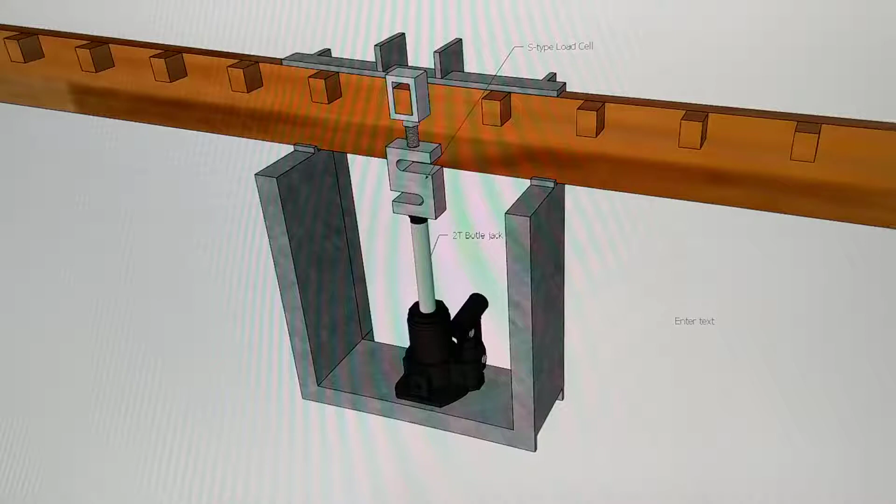Okay, I gotta share this with you guys. This has been taking over my brain doing this wood testing. So this is the rig I'm thinking about.

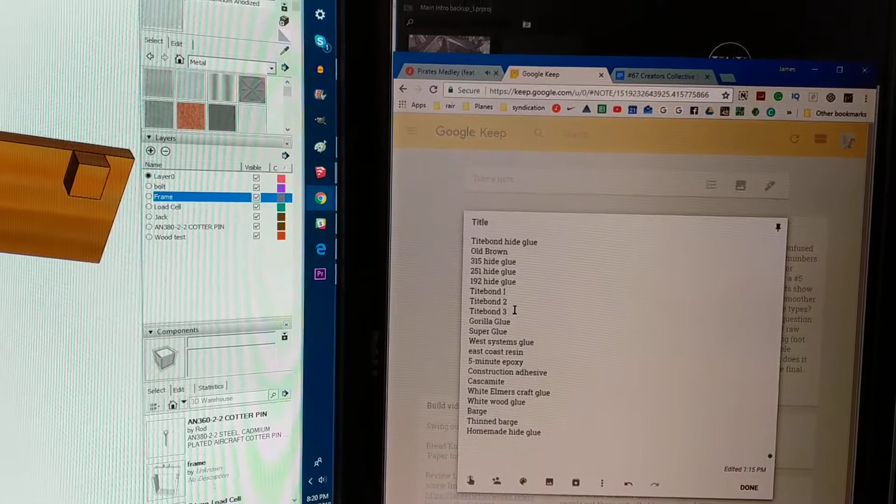Over here I've got my list of glues I want to try. Titebond, hide glue, old brown, the three different grades, 315, 251, 192, Titebond I, Titebond II, Titebond III, Gorilla Glue, Super Glue, West Systems Epoxy, East Coast Resin, 5-minute epoxy, construction adhesive, Cascamite, which is one that a lot of Europeans like, white Elmers glue, white wood glue, Barge, thinned Barge, and homemade hide glue. I'm actually distilling my own down from rawhide. I think it's 21 right now, something like that.

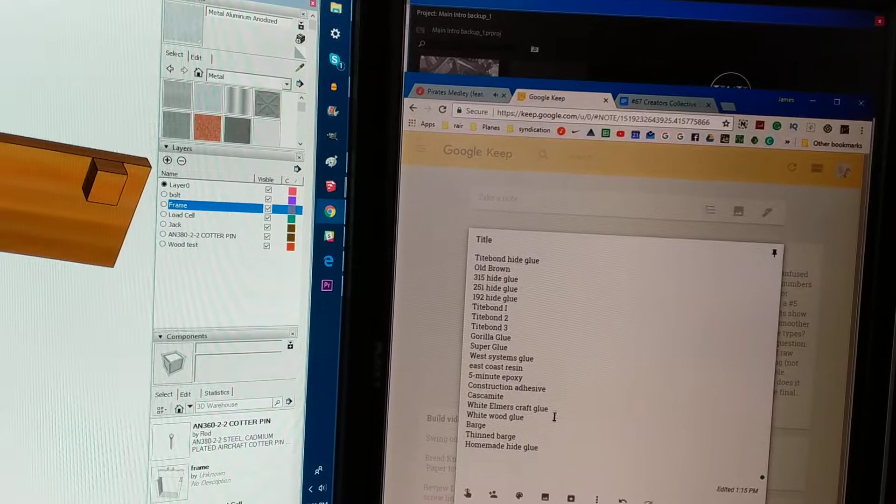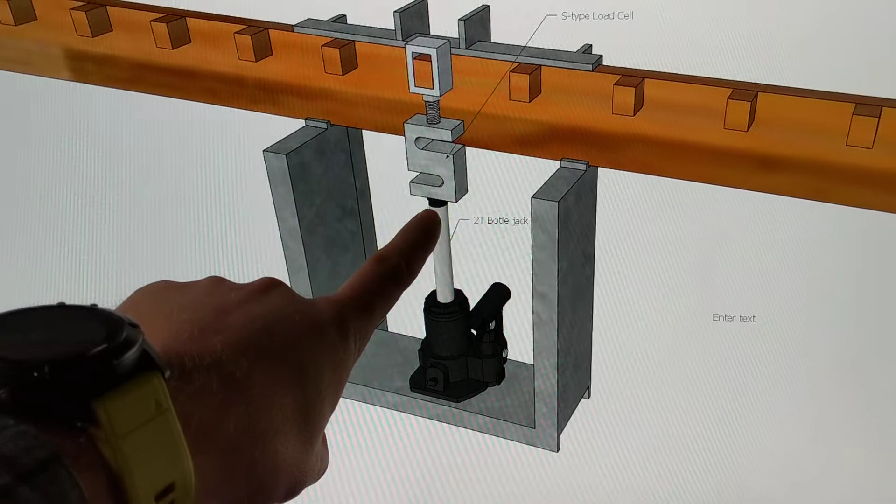So I want to try all of these, and this is the rig I'm thinking about. Here I've got a bottle jack that pushes up into a load cell, and this load cell is connected to a box that completely surrounds the wood.

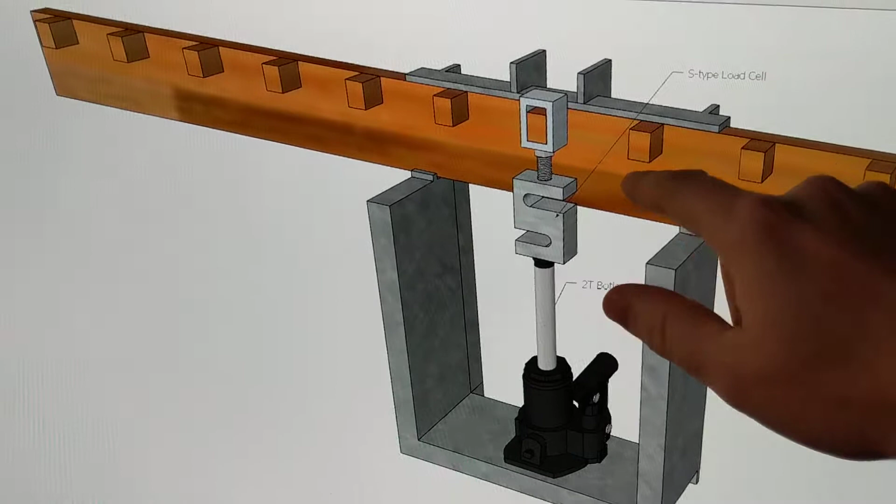Now the one thing I want to do that other people haven't done is actually test the bond between this little block of wood and the main block of wood. A lot of people test have a failure point where the wood itself breaks, and I don't want to do that. I want to force the glue to break, so that's going to make a ton of pressure, in some cases probably close to a ton.

So I'm going to be boxing this in and completely supporting this little piece with steel around it, so that all the forces on that shear line and this top bar that runs along the board are right up to that, so they're shearing against each other. So I get a complete shear pressure.

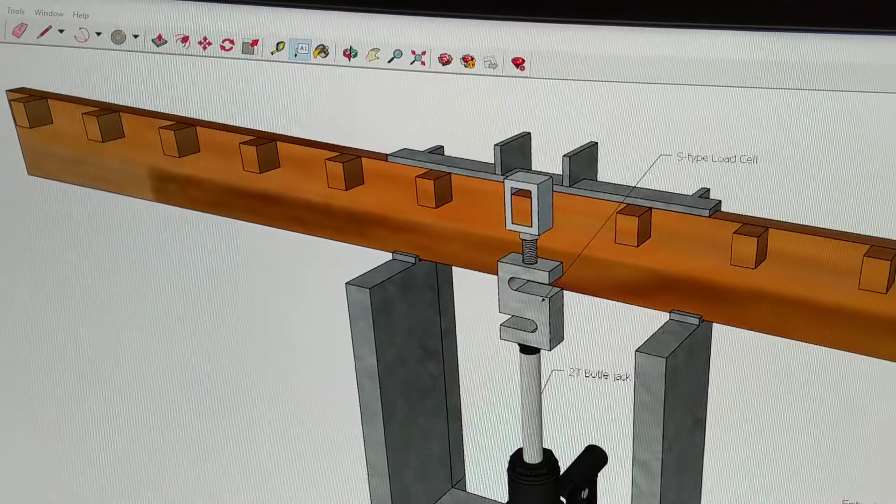The nice thing about this system is I can take this block and rotate it 90 degrees and also test the end grain of it. So I can have face grain to face grain, end grain to end grain.

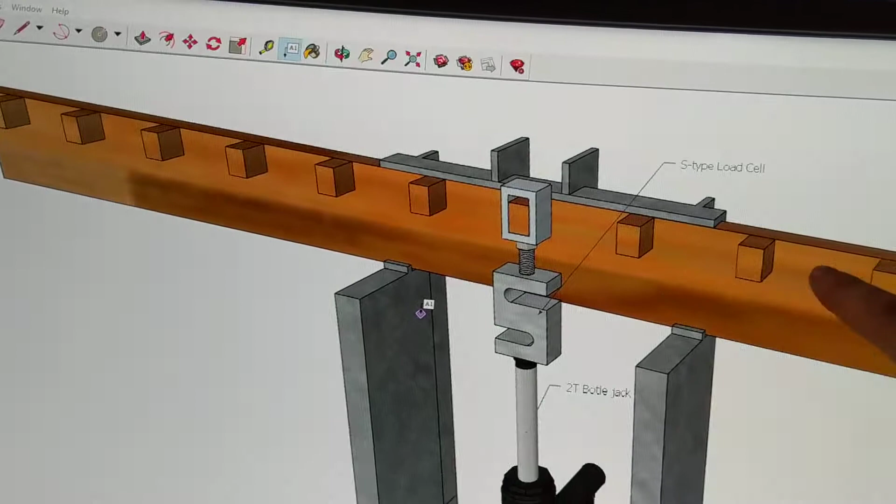And then I can also remove material from the back of the block and test how well it holds up on voids. And I can take this whole wooden piece with all these blocks glued onto it and set it outside in the rain for a day or two and then test it in moisture. So I can do all 4 of those tests.

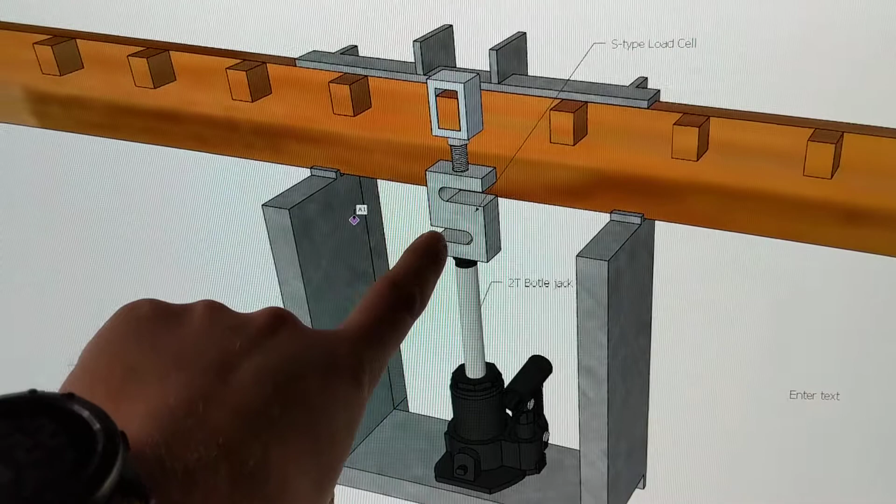I'll need a whole bunch of these boards made up, and each one will have a glue holding that one glue on here, and I'll mark underneath it what its glue was and what pressure it sheared off at. This load cell will give me the highest pressure before it lets loose, and I can actually see on the computer the bar graph of what that says.

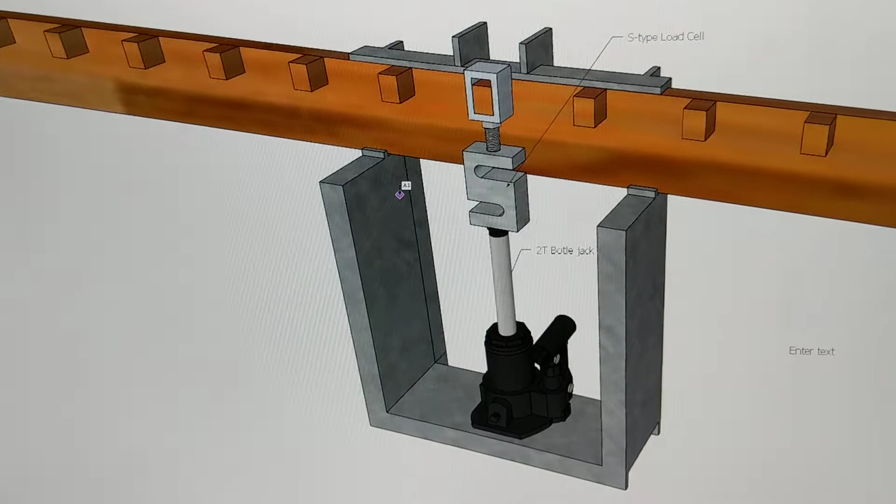All told, this rig has probably ended up costing me somewhere around $1,000. But I think it would be good information, having all 20 of these, particularly with the hide glues. I haven't seen much information on the hide glues, so I'm really looking forward to doing that.

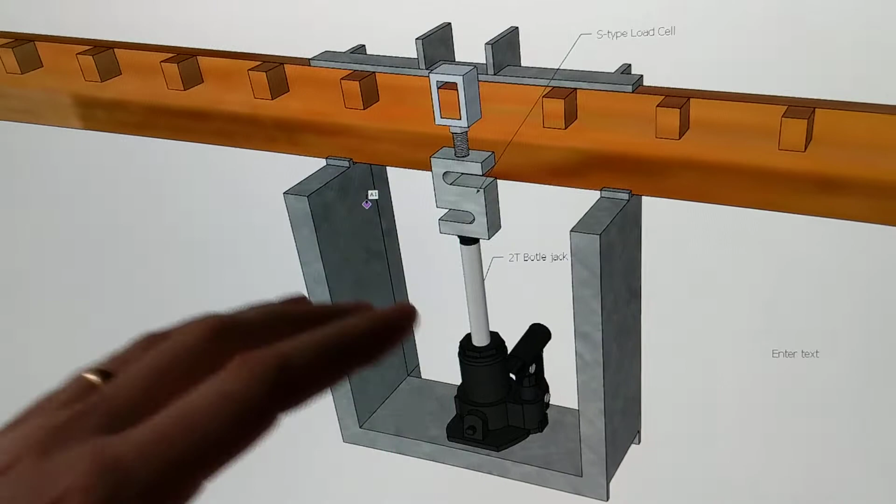I'd love to hear your ideas on this particular setup. I'm really trying to focus on the glue. I don't want the wood to fail, and I don't want to test different joints. I actually want to know what is the strength of the glue and the glue alone, eliminating all other variables. That's why I don't want to do a lap test or a joint test. I want to simply know what is the glue strength.

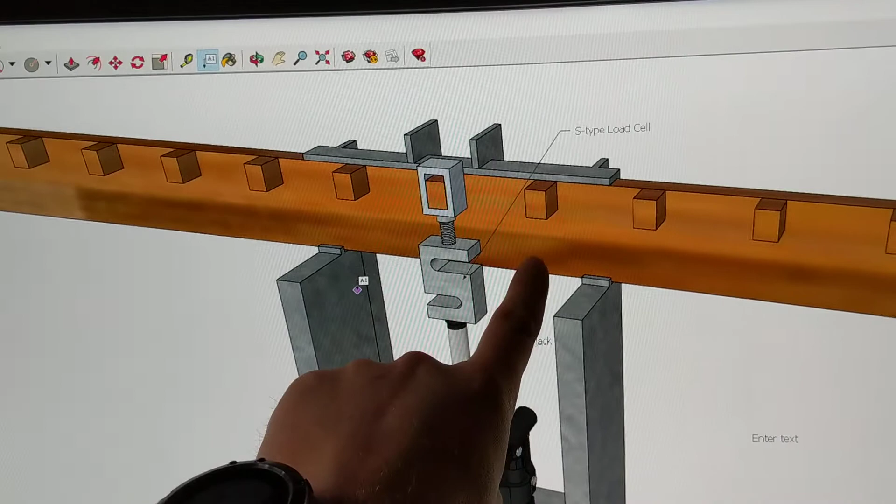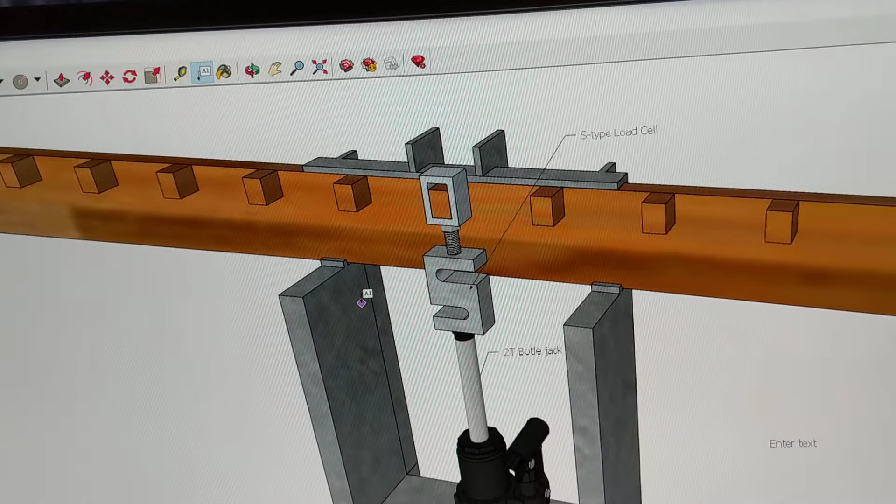So yeah, this is what I'm playing with, and I'd love to hear your ideas. I know this is in shear, and I think that's best to try. I have thought about merely pulling the block off, but I haven't found a good way of supporting the block, because most of the time the wood is just going to break before the glue does. I'm also planning on doing this all out of maple, so there's less chance of the wood failing, as opposed to pine, where the wood would fail long before any of the glues.